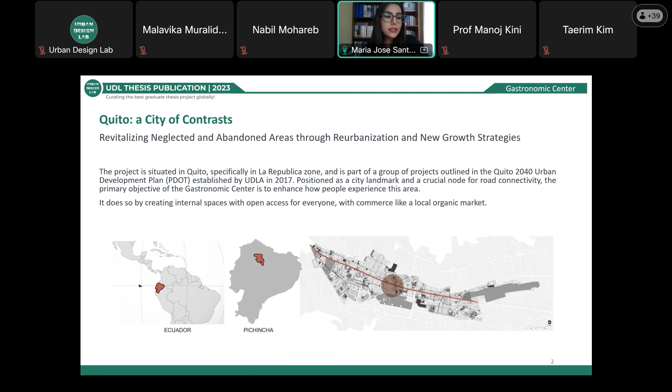In this place, we have some troubles that I'm going to explain right now about how the activities are in Quito right now. So this is the first stage that I was talking about, 10th of August Avenue, and the place of the equipment is right in here.

First of all, I'm going to start talking about the problems of the place. The transformation of 10th of August is deeply influenced by gentrification and the subsequent depopulation of its once vibrant community. This issue is aggravated primarily due to the absence of a diverse mix of functional spaces and a deficiency in well-designed public areas. Without the variety of uses, the neighborhood loses its appeal to a broader range of residents and businesses, leading to an influx of higher income residents who often bring higher living costs. The lack of sustainable public spaces, such as parks and community centers, further diminishes the neighborhood's social fabric. Addressing these challenges is crucial to preserving the area's cultural identity and ensuring a more inclusive and sustainable future.

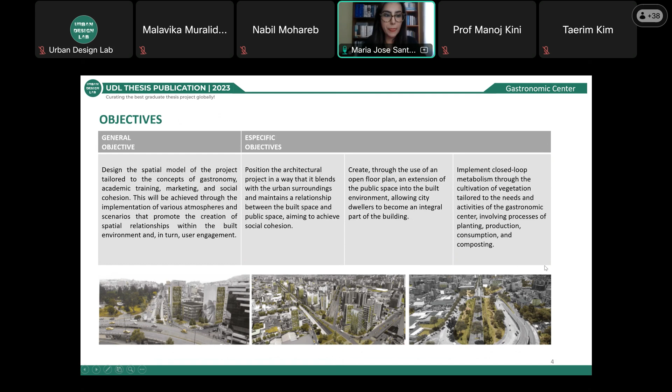Talking in a more local way about the neighborhood, this is the place where the project takes part, and this has four scenarios. On one side there is 10th of August Avenue, then we have República Avenue Street, which has the problem that it doesn't have a mixture of activities. Then we have Isabel Tobar Street, which has a low affluence of people.

And then we have Floron Park, just in front of here, which is a green space, one of only two green spaces in all of this neighborhood. This green space doesn't have the possibility for pedestrians because of the avenues, the cars, and the traffic.

So one of the proposals for the project was, first of all, to promote the flow of pedestrians between all of these streets by the creation of a free floor plan with the equipment. Then we had another strategy, to promote more activities in all of these streets through the mixture of uses, by the creation of commerce and gastronomy places.

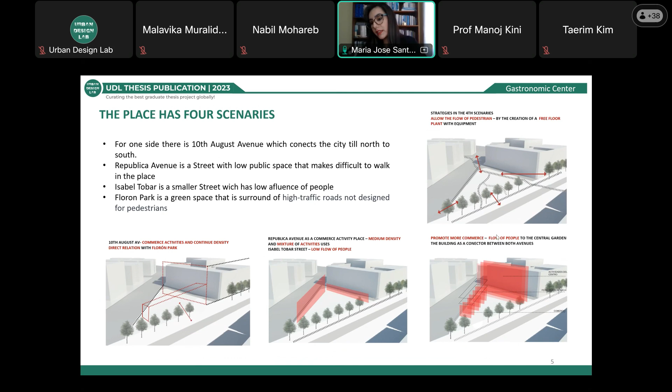Between the problems that I told you about, these are the strategies: I planned to reconnect those avenues by promoting wooded routes, promoting pedestrian flow between the lots, and generating a connection between the park and the First Avenue with the project.

The access of the project is generated by the nodes in the different avenues. We have a free open floor, so a user or citizen walking on 10th Avenue can get into the building and cross to the other side with all the commerce in the floor plan, and a garden structured inside the building. Another strategy was to improve the public space for pedestrians and generate better mobility between all the zones.

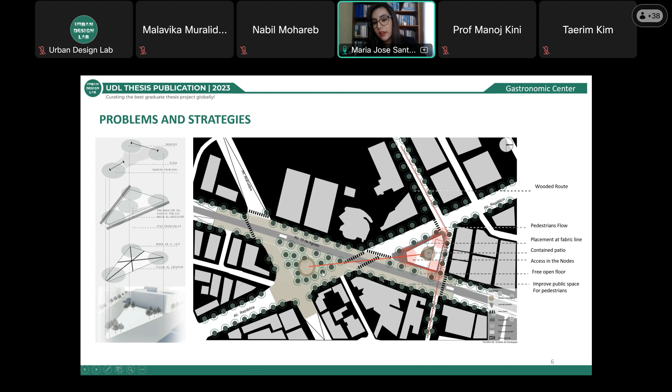By the architecture solutions I planned, I used tectonics, with an exposed modular structure. This promotes permeability for users moving from the public space to the private space, which is semi-public in the floor plan.

The other idea is based on the living square that is contained, a contained yard for a perimeter edification that has permeability with all the public space in all the views, including the visual connection with Floron Park.

And then I have this other idea about vegetation in harmony with the architecture, the development of gardens with organic products for the gastronomic activities of the building. These were meant to be on all the roofs of the building. I have three big roofs promoting organic gardens, as well as the contained yard.

Then another strategy was the sensory tours, where users recognize spaces that contain different activities that could enhance people's senses.

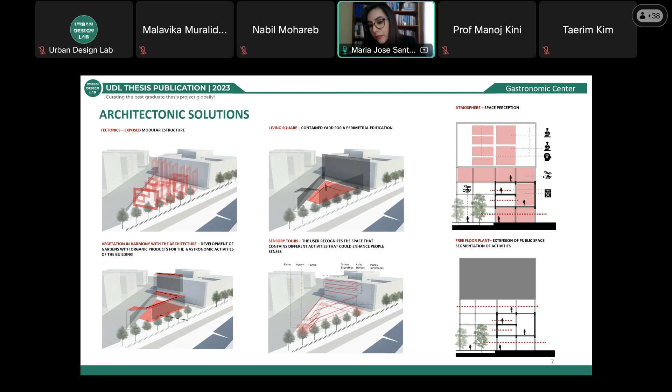And I have this closed loop metabolism when we make the activity of sowing, harvesting, production, consumption, and recycling because of the gardens on the roof.

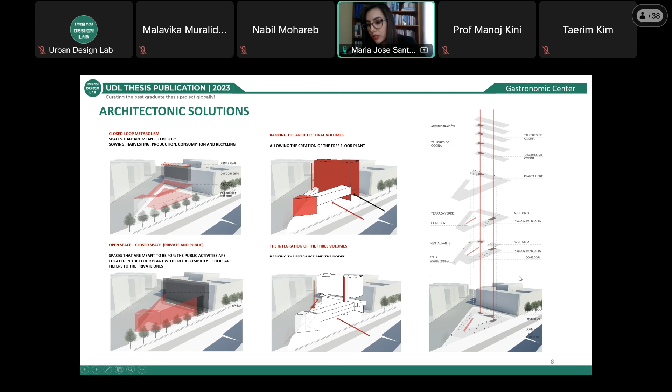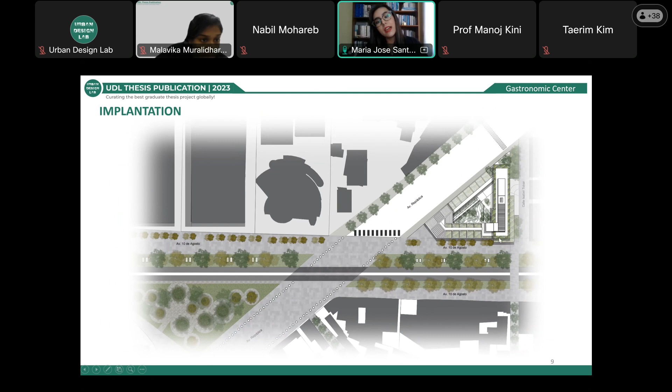As I told you, this is the program of the project. We have a really open floor plan that promotes the flow of people. Then there are activities that are semi-public, where people can take part by the translation in the ramp all around the building. And then there are the activities of the gastronomic center in the vertical space.

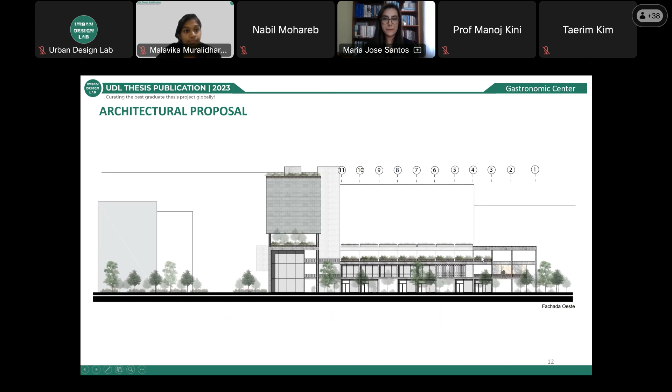So this is one view of it.

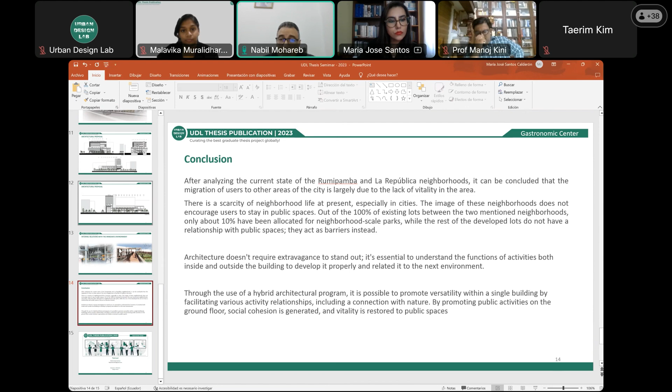Thank you very much, and thank you for the project. It's a simple but elegant type of project. I like the project, I like the form, I like that you've provided spaces at the ground floor for people to flow and see to the other side. When we build on an empty land, by the way, is it empty land, or was it occupied by another function before?

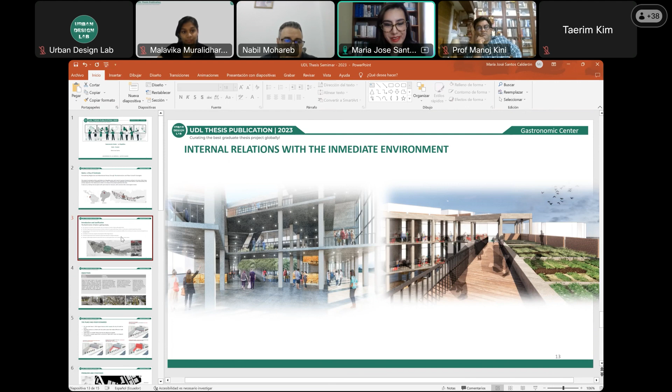Can I show you the photos? This is the place right now, it's empty. It's nice that you maintain the visual continuity between the two sides of the street.

But I can see here that there were a lot of trees. What did you do with the trees? These trees are in another place, it's another lot, not within your site. The lot in the middle is the one that is empty right now, it's just used as parking.

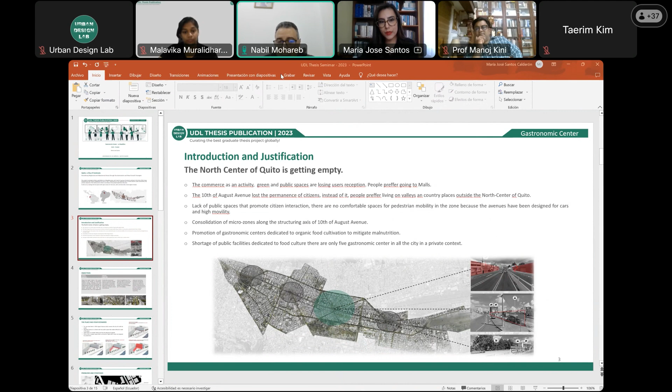I don't have more questions for you. I like the simplicity of your project, it's really nice and elegant. The best part I liked is that you provided spaces on the ground floor for a continuous flow from one side to another, so it doesn't block the view between the two streets. That's a good point.